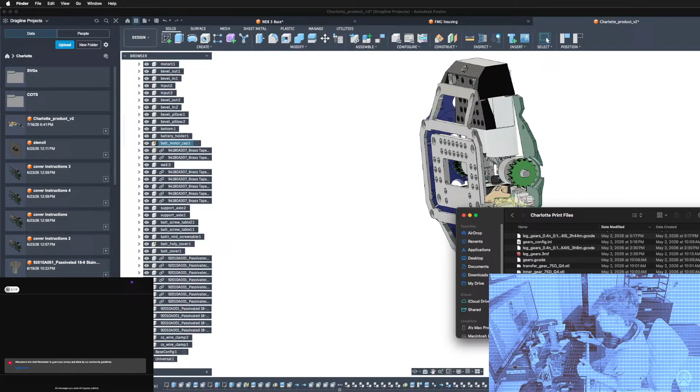Blah, blah, blah, blah. Okay. Cool, man.

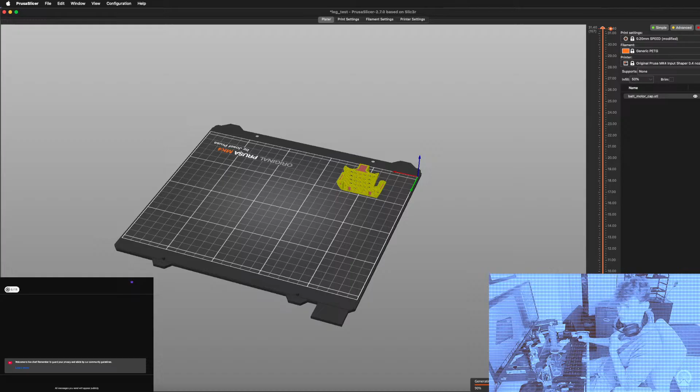Just getting some prints. Don't even worry about it. Word. Be right back. Don't mind me if I'm limping.

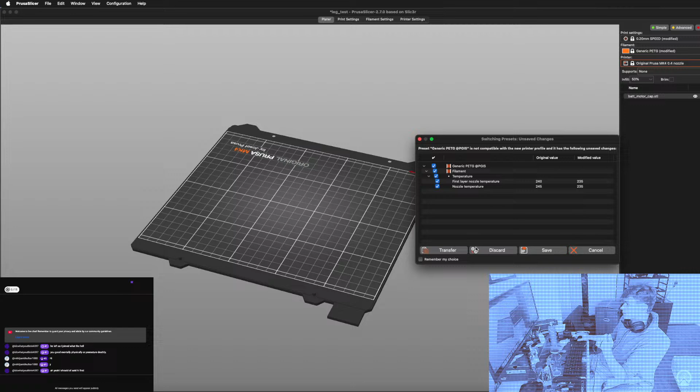None. Okay. Nope. Stop. We gotta restart this. Yeah, I should have said hi first. Yeah, come on, man. You just said he left as I joined. What the hell? Alright, be right back. Oh, fuck me.

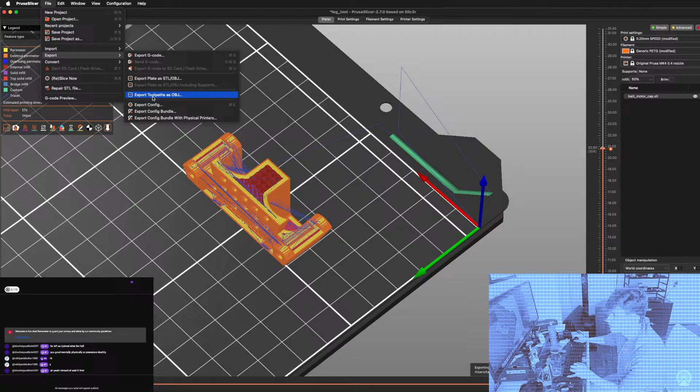Prints are not looking good. Gotta go a little slower and a little colder. Oh. But I think there. Okay. We'll try that. We will try it. And we will export this config so we don't forget. I'm going to call it int config for real this time.

Cool, man. Batt motor cap.gcode. Let's go. Hit it. Sorry.

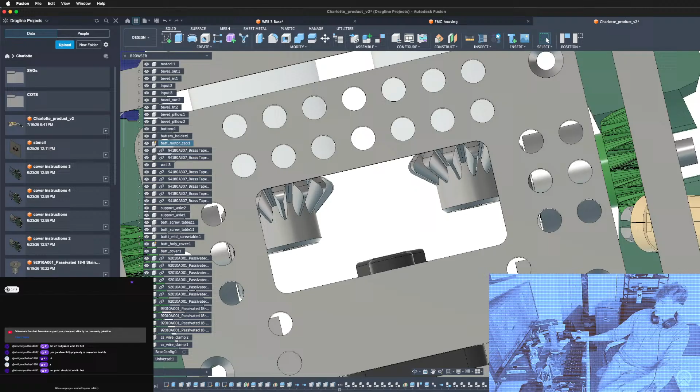Oh, my knee hurts, but the doc said that my critical knee components are fine, thankfully. So I'm just going to be swollen and limping for a couple days. No problem. I am, of course, indestructible. That is something that I don't say to my girlfriend because she will immediately dispute it. But that's what we're going to go with today.

Cool. So that's Charlotte. You guys know her. You guys love her. Just tinkering with a couple things over there. Get yours now. But we're going to go back to the web because the web is coming to a place where it's going to be done soon, like the design. So

Excuse me. Jesus. It's still smoky outside. I can only see about 2-3 blocks in the distance. Thank you, Canada, and thank you, billionaires.

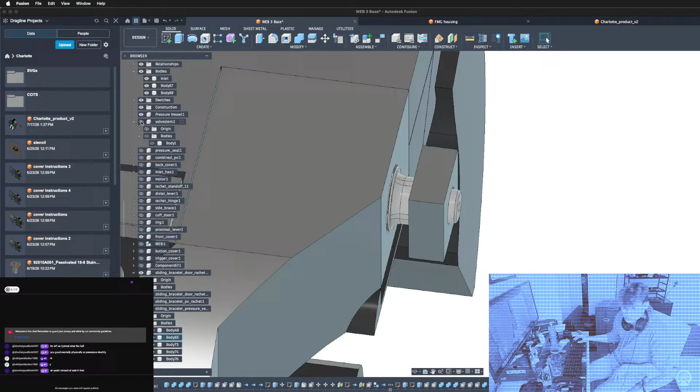So we are going to work on this. You can see the pressure vessel shape is coming into view. I have the valve placed here. I've made it shorter than the old valve. Where's the old valve? Right up here. That's the old valve. That's the new valve. So shorter because we don't want things sticking out as much in this design. And it doesn't have to stick out as much, I hope. We'll see.

I still don't have the mounting. That's part of the reason why it had to stick out so far on the old design, because there was mounting. But yeah, pressure vessel, kind of a crazy shape. So we're going to have to deal with that if we can. So what is going on here? That's one part, right? Okay. Cool. That's what I thought.

I need to figure out exactly what kind of mechanism I can get away with here, because I'm starting to think of different things other than the 2 levers that I had before. And I'm kind of like, should I be doing that or shouldn't I? Because a lot of thought went into that initially. So what I want to do is actually watch the video where I created this. It's kind of like reading your own paper, I guess, to try to remember what I did and why I did what I did. Go here. All the way back. This video.

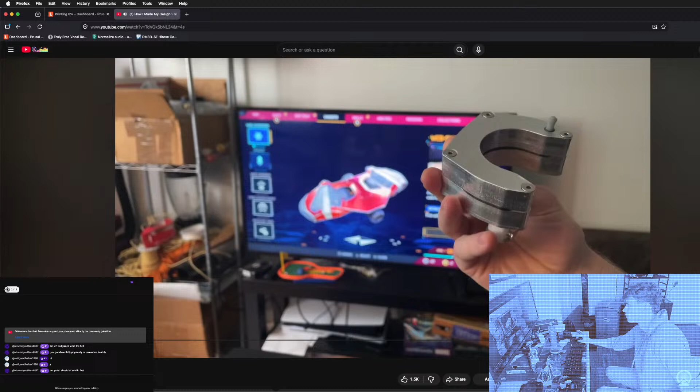Be right back. I have to do better. Struggling how to end that commercial, balls of steel. We already did the brick, and then you did the hammer. Cut to black! Yeah, cut to black. That's an excellent idea. Boom! So I came up with this random way to talk about this rather interesting comment that I got right here. And I'm not going to put the person's name. They also gave me some really helpful advice with the machining, which is so much appreciated. Thank you so much.

I just want to sort of open the discussion a little bit. Whether you use guns or you don't use guns, or you like guns or you hate guns, it's just really not a matter of fact. Newton's fourth law of motion is not that guns are the best way to protect yourself. Maybe just think about what the future could look like.

But then we also have to think about the different kinds of defense. What kind of situations will people be in where they need to defend themselves? If it's home defense, firearms may be the best way to do that. There are a lot of people who carry things like mace or pepper spray, intentionally non-lethal methods of self-defense. And like this person said, the device does not really need to exhibit a capacity for murder to be an effective deterrent.

When they're having a night out, or they live in a bad neighborhood and have to walk home. Ladies, you know what I'm talking about. Men, talk to your girlfriends. You're having a night out, you could encounter people who are dangerous and they might not be armed. And mace and pepper spray is a very effective deterrent for these people.

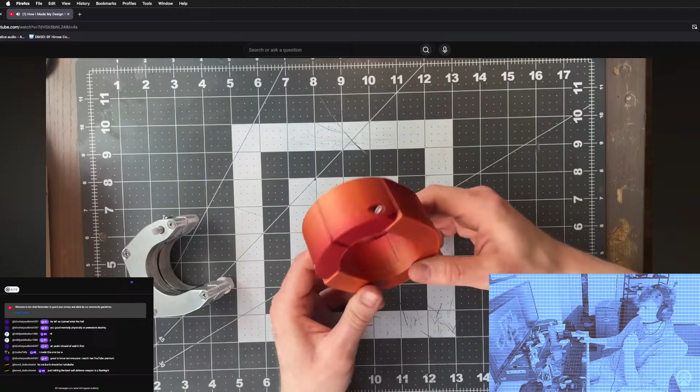Sorry, guys. So the first thing I want to work on in this video is having something where you have this device here, and then you've got these two parts that are on a pivot point. So when you want to put this on, imagine a full bracelet. You're just going at it just like this. And then let's say there are some springs that bring these back around. Then when you want to take it off, there's some button that undoes this latch. This was cool, but it doesn't really work when you have to fit stuff around the whole bracelet.

I also realized, because I'm an avid watcher of many 3D print designers on Instagram, that I could actually easily embed these magnets inside the 3D print by placing them in the middle of printing. That's a technique that I did not come up with, but it is super handy. So there's just a magnet inside there and a magnet inside there, and you can see they stick together. There's no fasteners needed, no glue needed. This is the magnetic spring.

I also added sort of a stop. This can only rotate 90 degrees. And I also added a little latch mechanism. So you can see here, there's a little leaf spring here. This didn't work, by the way. The leaf spring looks like this on the inside. And it's super easy assembly. All I have to do is stick it over.

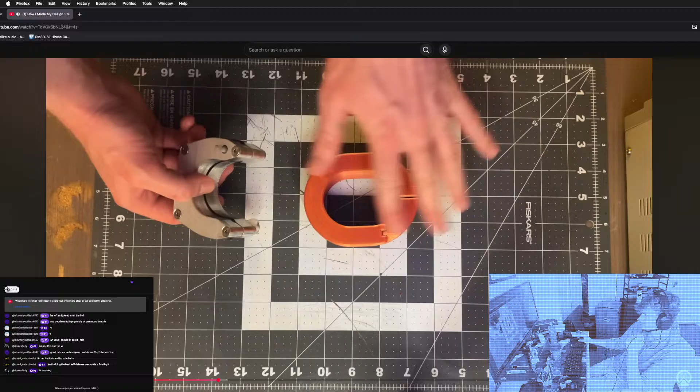The only issue is this kind of leaves minimal room for everything else in the wristband. The part of this clasp mock-up that doesn't move is actually mostly taken up by the pressure vessel itself. But this is definitely the clasp mechanism that I want to go with. So we're going to need some creative solutions to figure out where to put everything else that goes into this device.

To start, I want to focus on the valve actuation. There's a bunch of different mechanisms that I've created for valve actuation in the past: levers, screws, gears, pulleys, capstans, all sorts of things. I really want to try to streamline it, come up with something that's compact or at least fits within this C shape, and something that is optimized from an engineering standpoint, in the sense of what is the minimal transmission that we need such that our actuator can open this valve.

It takes quite a lot of force to open this valve. I don't know exactly how much, but the first step in figuring out what kind of transmission we need is to actually measure that amount of force. All right, so I've mounted my pressure vessel to the table here.

The liquid will be at the bottom of this pressure vessel because of gravity, and that means that I can see when a stream is coming out, because if it was vapor, it would be invisible. And then I have this sort of marionette controller. I have no idea what that's called. I've built it such that it's just a single rope winding through this entire thing, so that the tension is the same, and this mounts right here.

And I've got this thing attached to this spring force gauge, and I can pull on that. Sorry, it's not very sophisticated. I intend to just take slow motion video from directly below and just watch what the reading on the force gauge is at the instant the valve is opened.

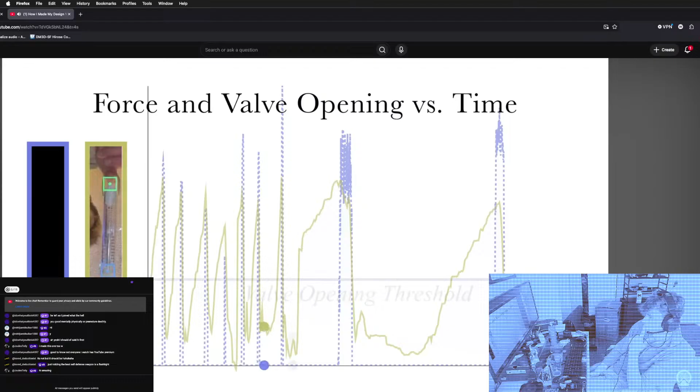And so I could overlap these two graphs and then only sample the force readings above a certain valve opening threshold. That gave me an average force of opening the valve of about 20 newtons and a maximum force of about 28 newtons. This contrasts with another analysis I did, that is the force based on the vapor pressure and the diameter of the outlet, which predicted only about 5.6 newtons. So there must be quite a lot of friction, or there must be some other force acting upon this valve when it tries to open.

You didn't miss much, Shira. I'm rewatching this because I need to use the analysis that I did here in my new valve actuation design. I don't want to do it again. I just want to recall what I did over a year ago because it should be the same result. But I kind of want to see if I can get away with something that's not the levers here, because I want to try to reduce the compliance. And when you have a really long lever, and I do want to make it out of plastic, I could machine everything, but it's just not feasible from a cost standpoint. So I want to see what I can get away with, maybe less material in bending would be nice. If I have to do the levers, I'll do the levers. I'll find a way to do it right. But it has to be the same kind of transmission with the same kind of gear ratio.

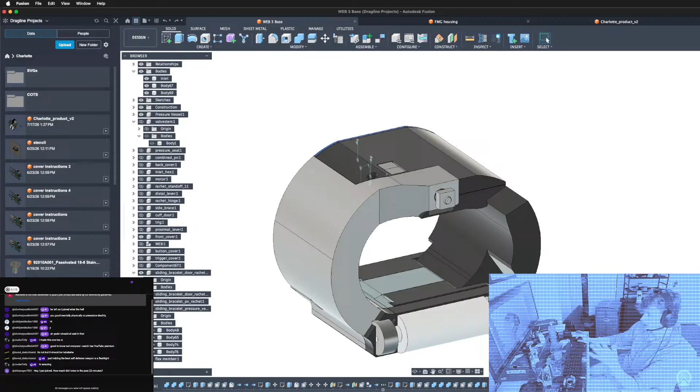So the thing is, transmissions are all about an equivalency of power. So power in has to equal power out. Now that's assuming efficiency is 100%, and this essentially would only not be true if there's friction in this transmission, which of course there will be, but certain types of transmissions are closer to 100% efficiency than others.

What is power in? It's equal to the torque multiplied by the speed. Now this speed is in radians per second, but we can turn it into rotations per second by multiplying it by 2 pi. Here we represent rotational speed as n rotations divided by t time. On the valve side, we have this valve that has to move a certain distance, x. And the force that's exerted as it moves this distance is F.

That's what we measured. Now we're going to assume this force is constant as the valve moves, and that means the work that is done, which I'll represent as W, is equal to F times X. So if we want to get the power that's transmitted to the valve, we simply have to divide work by time. Now, the key equivalency between these two is that the amount of time it takes the motor to spin to open the valve is the same amount of time it takes the valve to open.

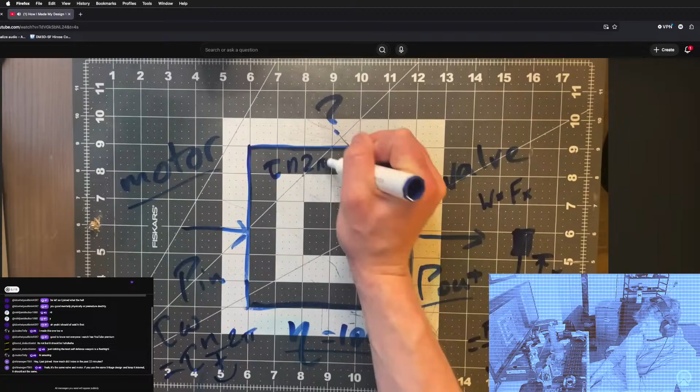First, let's start by setting power in equal to power out. Torque N 2 pi over T equals Fx over T. Since these times are the same, we have Fx equals T N 2 pi. Now, we have this torque as a function of voltage. That's the data that we gathered for the motor. And if we rearrange this, we can have the number of rotations that are required to open the valve as a function of voltage as well.

Now, this is actually a lower bound. Essentially, what this is telling you is that it's not physically possible to open this valve with any number of rotations less than this amount. Okay, great. Let's keep that in mind.

So the number of rotations is key here, right? Because in this original version, I only have the motor rotating halfway around, and that's great because then I get a lot of speed out of that, right? Because it doesn't take very much time for the motor to rotate halfway around. If I wanted the motor to have to do like 5 rotations to open the valve, which according to this lower bound that I've discovered is still possible, it would take more time, and that's not as nice for a very quick release mechanism. This is good info.

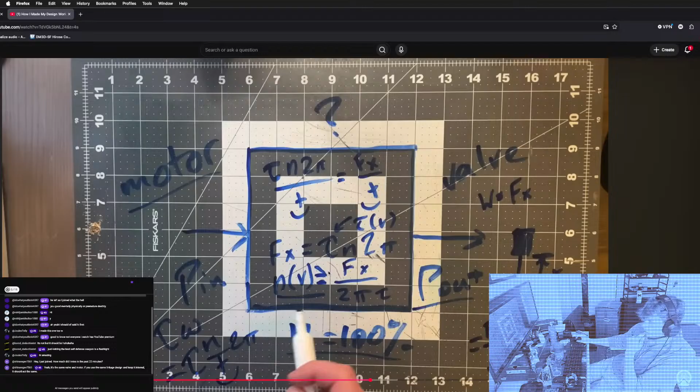With any number of rotations less than this amount. So this becomes our lower bound for what is possible. But then there's a question of what is this torque exactly? A key characteristic graph of a motor looks something like this. So if this is torque and this is speed, this is called the stall torque. And that's what we measured. It's the torque when speed is 0. This is called the no-load speed, because it's the speed when the torque is 0.

Now, what about the effect of different voltages? Because we measured this stall torque at several voltages. Let's say this is the graph when voltage equals 1. If we increase the voltage to, let's say, 2, it just shifts the curve upward like this. So you can see we do have that increase in stall torque that we observed from our graph. And our data for stall torque, depending on voltage, had a very linear relationship with an intercept at 0, and we fit a best line to it. And this relationship actually is theoretically expected.

The reason for that is because you can model any DC motor as a voltage applied across an armature that has some inductance and some resistance, and another voltage where the voltage across this is equal to the motor constant K times the speed, and this is called back EMF. Now, when we're at stall torque, the speed is 0. This inductor usually has the equation voltage across the inductor is equal to the change in current, but because we're at steady state, current isn't changing. The voltage across this goes to 0.

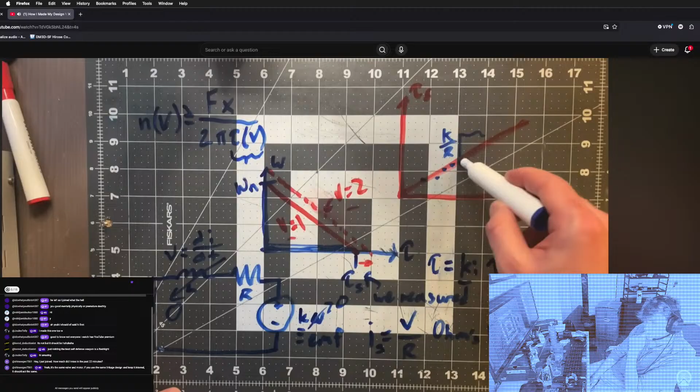Hi, it's me editing here, and I just wanted to say I did measure the resistance of the motor, and it's about 7.5 ohms, which means we can actually calculate the motor constant without ever measuring current, and we get a motor constant of about 0.05. So it's kind of cool we got all that just by taking a few measurements, but we don't want to run this transmission at the stall torque, right? Stall torque means the motor isn't moving. So we do need it to move.

Now recall that the power that a motor transmits, as we talked about briefly before, is equal to the torque multiplied by the speed. When you define your operating point on this curve, power is actually the area of the rectangle that's formed between the origin and that operating point. So we actually get the maximum power transmission at the stall torque divided by 2. Now we can change the ratio S. So right now we're talking about S equals 0.5. If you move S closer to 0.3, you have a little bit better efficiency, but...

Yeah, S basically being the percentage of torque that you want to transmit with respect to the stall torque of the motor at any given voltage. So that's why this line here is still a function of voltage, but it's S times the stall torque for S equals 0.5. So it's a line that's halfway down from the original line that we measured. If you move S closer to 0.3, you have a little bit better efficiency, but we're going to be working on maximum power transmission. Now recall that this is a lower bound, meaning that any point in the upper green area will actually still function. It's just that anything below the green area is physically impossible.

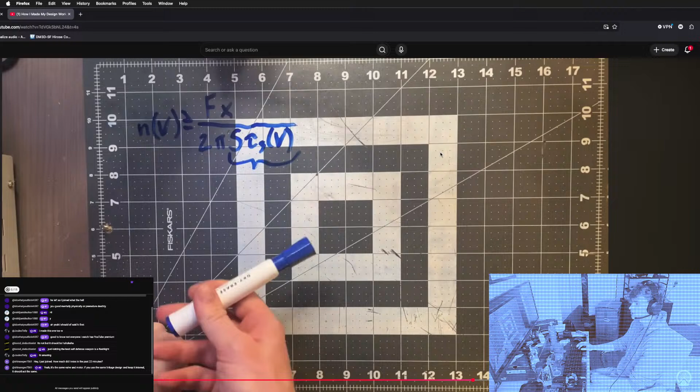Below the green area is physically impossible. Now, when I first saw this curve, I thought, wow, these rotations actually look quite low. If we're operating at like 2.4 volts, we only have to do half a rotation? That seems crazy, and that's...

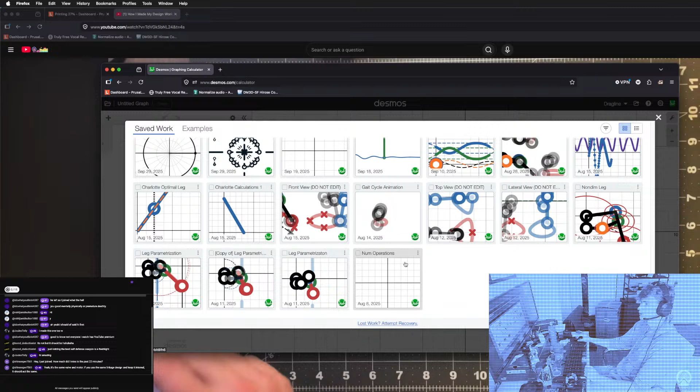Okay, something's up here. If I go to my original Desmos graph, let's see. That's why you always check your work, people. Oh, brother. Bruh. Don't do me like that. Come on. Okay, let's try to find this. I can't find it. Let me see here. No, it's got to be here somewhere, right? This one. Yeah, valve transmission. Okay. So that's this graph here. Okay, got to try to change the scale. There we go.

0.5 rotations. I literally have it marked right here. 2.48 volts, 0.5 rotations.

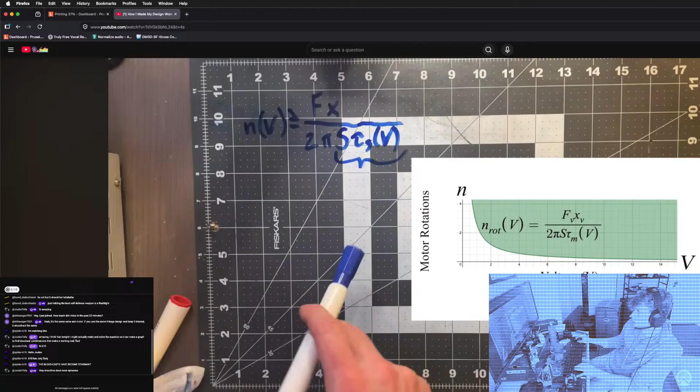Like I showed the area under the curve here, right? Yeah, the area under this curve is the maximum at half the stall torque. So that's what I was going to go for, maximum power transmission, not maximum efficiency. Efficiency in this case isn't really a big deal because it's not running continuously anyway. It's just a short burst of energy. So yeah, that's interesting. So I said 0.5, and it does look like it's 0.5. Very interesting. Where is my Desmos? There it is. So let's get that scale looking similar.

I also want to see the inequality as well. Okay. Please be green. Please be green. Okay. Right. So what this is telling me is that at S equals 0.5, for half a rotation to open the valve, I would have to use,

dude, seriously? I have 3 degrees in mechanical engineering. Of course I know how to use MATLAB. MATLAB is very expensive, and I'm no longer a student. Octave, yeah, that could definitely be used. But Desmos instantly comes with a GUI. If I'm doing something that requires more complexity, like control analysis or optimization, of course you can't use Desmos. But my choice would actually be Python at this point, because you have libraries for literally everything. Octave is just like MATLAB, but a free version, for people who don't know. But yeah, I know how to use all these tools. I'm choosing Desmos because the graphical user interface is immediate, so you don't need to program that in. It just helps me a lot to manipulate graphs visually. It's a great tool, and I'm not the only engineer who thinks so.

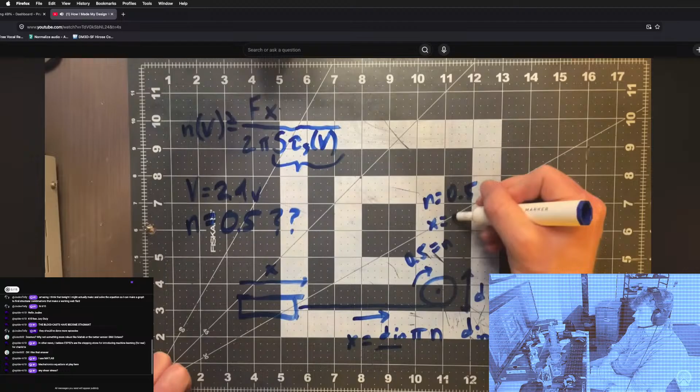Now, if we plug in some numbers here, x is actually quite small, 0.00088 meters. Wait. That's interesting. Did I explain where I came up with that? Because I'm kind of trying to remember. And I think I looked at the valve and was like, if it opens 880 microns, right? Let's look at the geometry here, because this is the same geometry that I had before. Unless I did change it, but I think it's the same. Same valve geometry.

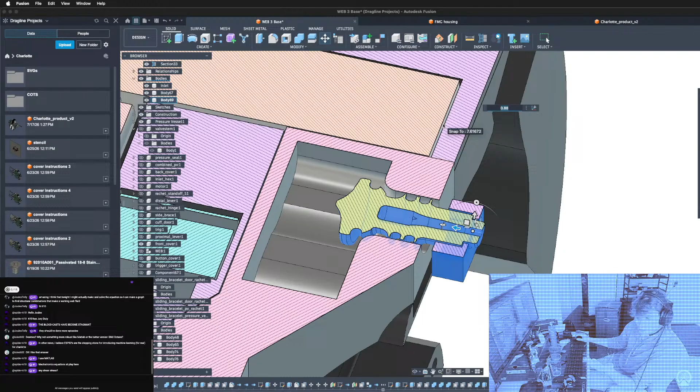Okay. So I said if this is sealed, 0.88. I guess we'll bring that along. I mean, yeah, you do open the valve then, but I think maybe the problem comes because if I am only expecting to compress this valve 0.88 millimeters, that can easily be compensated for by bending of 3D printed material. You know, 0.88 millimeters is nothing. So maybe I should plan for a longer stroke. You know?

Well, let me look. What did I actually do in Desmos? X. Here, I put that in. So that comes into play for all of these equations. And that's really interesting. If I amplify that, I'm guessing things will change quite a bit. Okay, let's see. Because what I want to do to get, you know, maybe maximum flow would be nice. 2 millimeters. How about that? That looks really nice.

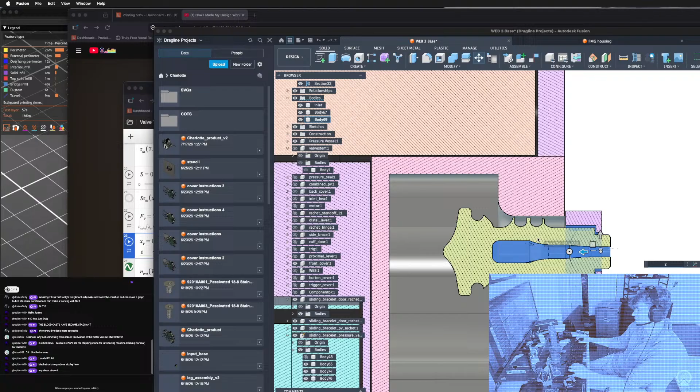That's like the maximum that I can get without these wall sealing O-rings kind of getting into precarious positions with respect to the wall. So 2 millimeters would be real nice. It's really interesting that I said 0.88 millimeters. It's really interesting. I know I measured that from something, somehow. All right, who's ready? Boom.

Okay. So now we're getting into something a little bit different. Now our safety factor has dropped to 1.3 from 3. So that's a lot more precarious. And it tells us that we should be using a supply voltage of 5.4 volts instead of what we have here, which is our supply voltage of 3.7. Just want to change the style. How about that? So that's our actual supply voltage. So bad.

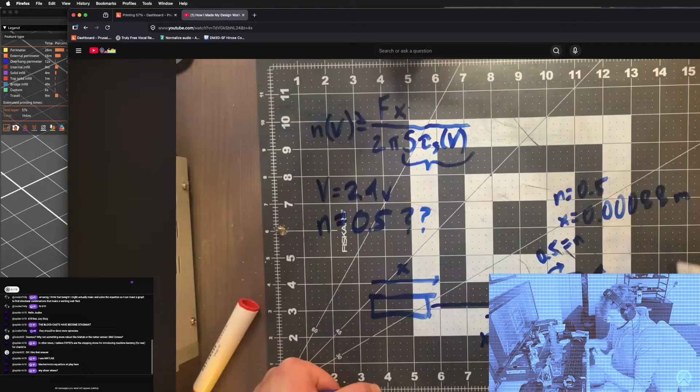Yeah. Okay, so my working theory right now is change the theoretical model to have a longer valve stroke. Yeah, because that also plays right into the mechanical inefficiencies in the valve design, the bending of the components that should be rigid. 2 millimeters of bending is a lot harder to do than 0.8 millimeters of bending.

This is defined by the design of the valve. It's going to be something like 0.0006 meters. You're not impressing my stream. Everyone knows you're... Stop. Yeah, so that's not happening.

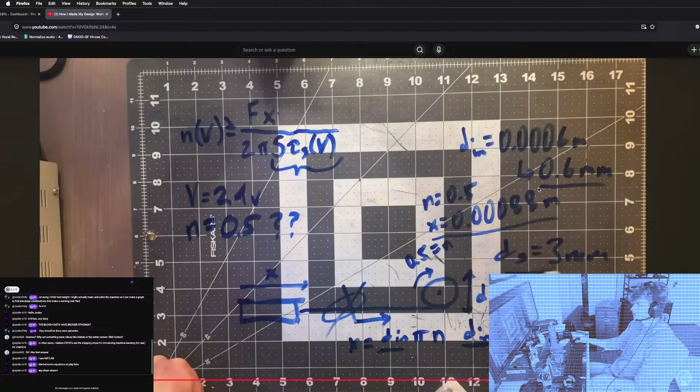And also, I don't want to do cable-driven mechanisms anyway, because they're really difficult to assemble. And the motor shaft is actually 3 millimeters in diameter. So what I'm saying here is this is physically possible if you have a shaft of that winch to be 0.6 millimeters, which is not physically possible. So I am taking that into account here.

So we really can't get away with any D in less than 3 millimeters, and probably should be even more than 3 millimeters. So this is why I'm doing a transmission, right? Because you can get a lot of torque theoretically from a motor if you just have a winch around a shaft that's extremely small, right? But physically that doesn't work because you can't have a shaft that's extremely small. How do we solve this problem, this constraint on the input diameter? This is where a transmission would come in.

We can rewrite our equation for D, again, as a function of voltage. This time we plug in our function for N as a function of voltage in the denominator. If we add a transmission, this equation for N is not going to change. So that means that everything in the denominator here remains the same. So if we want to increase the diameter of the input, we have to... Remember, this equation up here doesn't change because it's about power equivalency, which is not affected by transmission. To increase the input stroke.

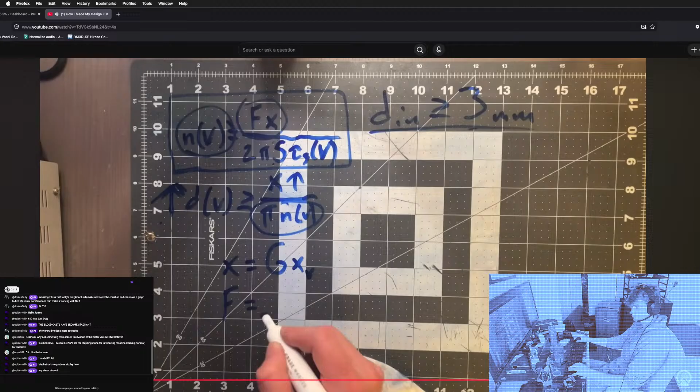What we can do is add a transmission such that the input stroke X is actually equal to some gear ratio, we're not going to use gears, multiplied by the distance that the valve has to pull. Similarly, the force that goes into this transmission is equal to the force the valve needs to open divided by that ratio G.

How many turns do we want the motor to have to do to open the valve? So if we have number of turns greater than 1, now we're talking about we have to do things like gears or belts, you know, like transmit. We can't do like a simple lever transmission if the motor goes through a stroke that's greater than half, really. Transmissions that can go greater than 360 degrees.

If we keep n less than 1, suddenly we're thinking about using things like cams, slots. Cams for a 360 degree rotation, I suppose. Yeah, of course. As long as there are end stops. But to be honest, I do know slots. What am I talking about? I do know that you can create like a spiral cam. I've done that before, and I thought I was a genius, but I scrapped it for the cable shooter project.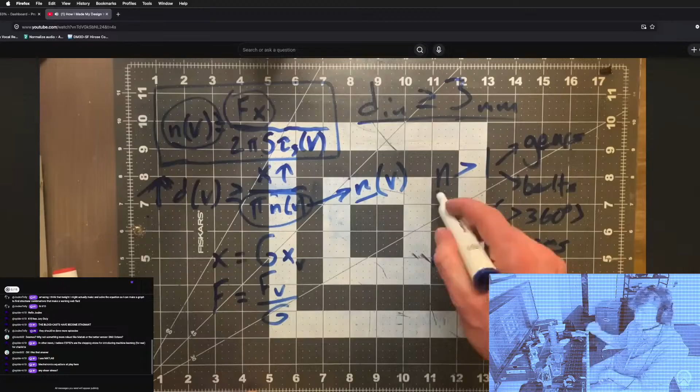There's a specific type of mechanism that I have my eye on, and that is where n is equal to 0.5, or a half turn. So I want you to imagine that your motor is driving a wheel, and this wheel is attached to some peg, and this peg is transmitting force to a lever, which has a pivot point here. And so as we get that half turn, the motor moves the peg this way. It ends up here at its farthest point horizontally, and finally ends up here. This means, of course, that this peg needs to have a slot to accommodate that horizontal movement.

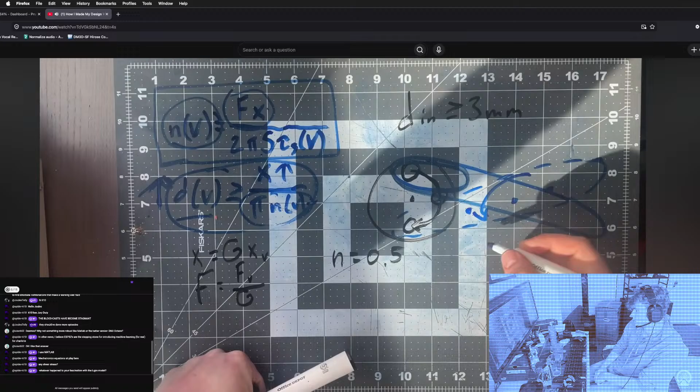The amount of space we have to work with is just what's on this bracelet. Here we have our motor, and the motor has an axis here. So I want you to imagine this wheel that we drew here is right here, being driven by that motor. So when you look at it from the front, you'll see the circular shape, but on this side you just see that. And the valve that we have to actuate is down here. That motion is along this axis. So what we could do is we could have that lever essentially with a pivot point here, basically rotating like this, and that lever basically...

I'm still fascinated by the LuGre model of friction. Just only have so many hours in a day, you know? That's for the cable shooter project I'm mainly thinking about, but I haven't had the chance to do the experiments I want to do yet.

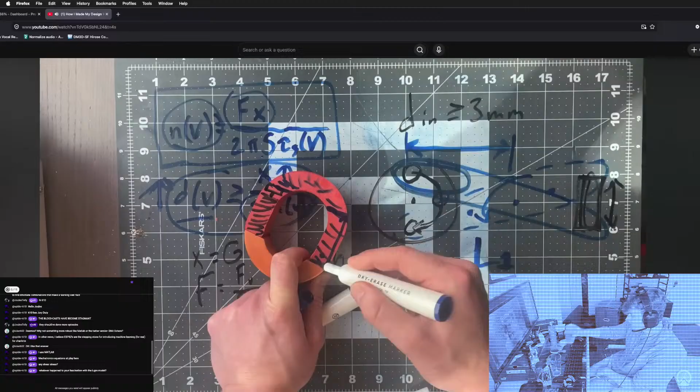It takes up this whole space. A mechanical advantage is the ratio between this distance and this tiny distance here. So we can see by modulating our D of V model, by adding G and modulating X, suddenly we see at 2.4 volts, this transmission... So that's where this comes into play, is the gear ratio of this transmission.

Where the heck is my... What the heck? What button do I press for showing all the windows? Okay, there it is. All right.

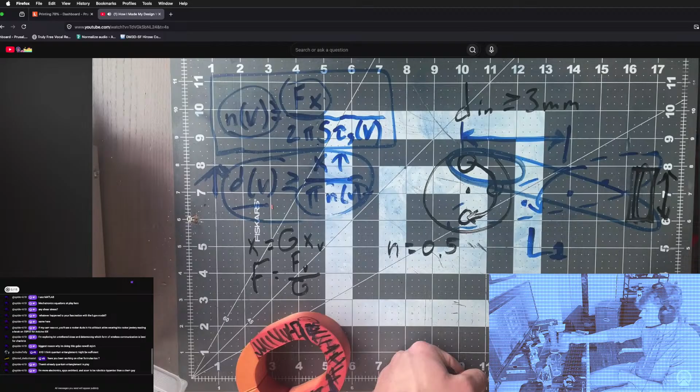I think something interesting becomes possible from an engineering standpoint, because D is suddenly above 3 millimeters. What I actually decided to do: this part is taken up by some lever that has a mechanical advantage, and this part is taken up by another lever. Our G actually becomes L1 times L2. When we add this G to modulate our D of V model, suddenly this becomes very feasible from an engineering standpoint. After tweaking the model a little bit, I got exact numbers that would work for L1 and L2, such that it would fit on this wristband and be able to actuate the valve theoretically at a very low voltage, possibly less than 3 volts. I don't expect it to be that low in real life. A very exciting prospect for me.

Okay. So I'm in an interesting situation here. Am I? Wait, I think the math is consistent. Hold on. Because the pull distance at the input that we're going to need, this is all based on winch geometry, right? That's very simple geometry. So that's x1, and D in at V min is the diameter of the shaft that I'm going to need. And if we multiply that by pi, we get the pull. Okay, so the math is consistent. Right, thank God.

So how do I translate the winch mechanism into something that I actually will like to use? Because I hate winches so much. I hate them. But it would work.

I'm better at making mechanisms than I was when I made this video. So maybe I can take the old math and apply it to some new engineering. I could have a pulley shaft of 3 millimeters easy. That's no problem. It could rotate once around, and then this gear ratio would have to be still 6.

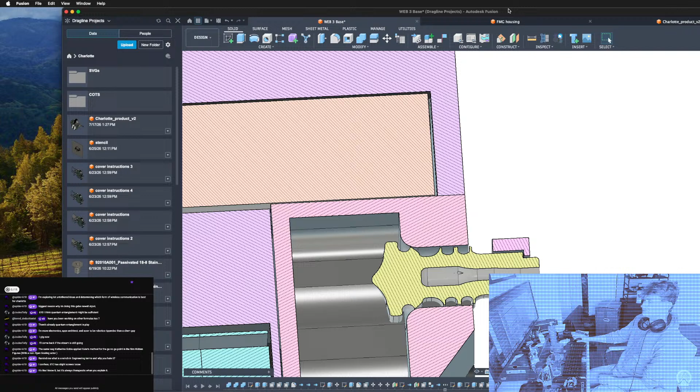So everything that fits over here, somehow transmitting power around the circumference of this bracelet, which we accomplished before with the levers, but now we can't use levers anymore because we want to do a full rotation. And also the levers have a variable transmission. I'm going to start drawing some shit.

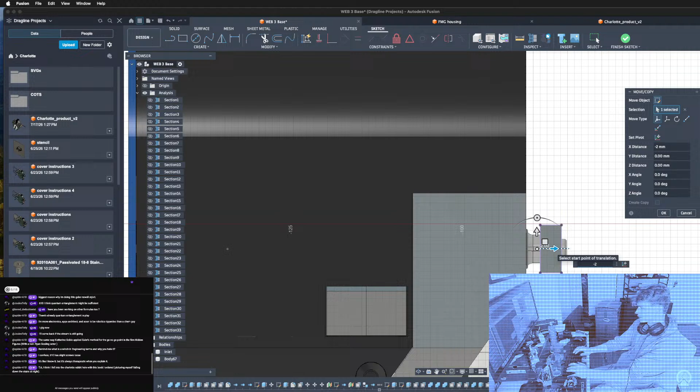So I'm just going to pretend there's a point like here. Okay. And that point has to move 2 millimeters this way. That's consistent with the theory. Okay.

Picturing yourself falling down the stairs at night. What do you mean? What does that have to do with Charlotte? That's horrible.

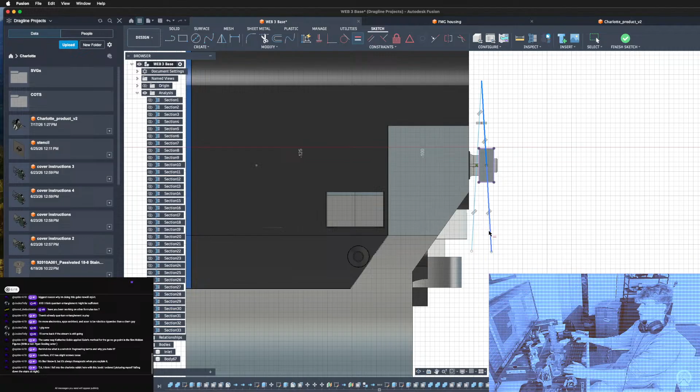I want to imagine that I have a lever somehow. Right? Not looking at the physical yet, just the mathematical. So these are equal. So this is about where this pivot point is going to be. And if that lever has a mechanical advantage of 2, that means this is all parallel and equal. Okay.

So obviously, I wonder if I can make a driven dimension. Is that possible? Let's try that first, then try this. Yes, create driven. Okay, and then what happens if we delete this? It's still driven. But also incorrect. What? Oh, no, it's not. It's always 4. Of course it is, because it's 2 times 2. Great. Well, this is nice. It doesn't stick out too far. But I am kind of wondering. What can we get away with?

That's a good idea. Yeah, that'll be a cool Charlotte project. I think that's great. I am printing some of your parts now.

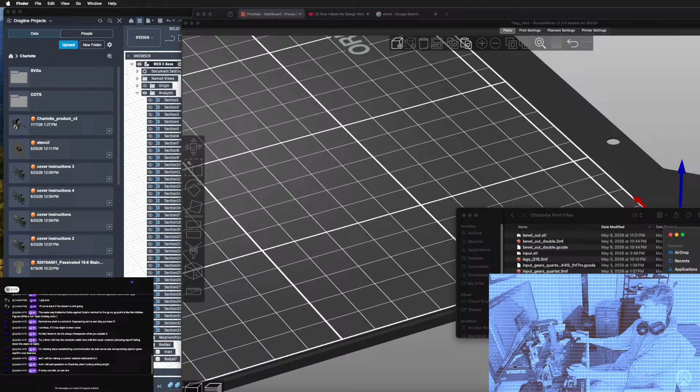Oh, it's done. I should print the next one. Well, I gotta check how it looks first. But yeah, should be good. Let me just get this ready. Battery config. Battery holders and next part. Okay. Great. No, no, no. Go away. Slice now. All right. Okay. Be right back.

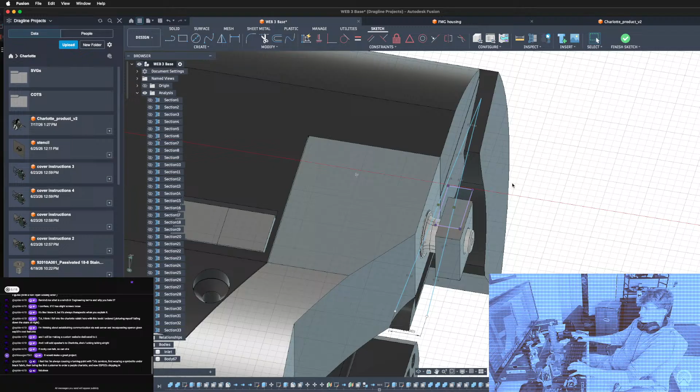So just because this travels 2 millimeters doesn't mean it needs to be attached to something that travels 2 millimeters. You know, it can just be pushed down on. And then the mechanical advantage isn't theoretically the same, but might as well be. So what I'm thinking, because this is kind of sticking out here, I was wondering if I could get away with something like a circle shaped lever, you know?

So we put that there. Like the pivot point could be that far in, but where's our motor? Because we might need to go past it. Yeah, our motor's there. So if we can attach to the top and the bottom, that could work. Let's just see.

Are you changing the linkage reduction ratio at all? I'm changing it, but I haven't already figured out how I could change it. So we've basically changed a lot of the parameters. The input stroke is not the same because I found out that we don't actually get a decent enough safety factor if our input stroke is 0.5 and we want a larger output stroke. So I'm changing the input stroke to be a full rotation of the motor. That's a key change.

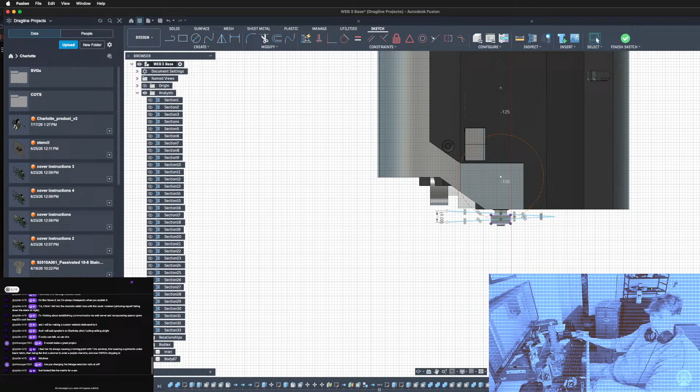Which means that we can really make the reduction as much as we want. But right now I'm going for 8. It could be less, but I just want to see what kinds of geometries we can generate that would be reasonable. So yeah. Go away, circle, go away. Okay.

I'm gonna get... I'm just like, can we get away with what I want to get away with here? Maybe. But the motor, we definitely can't do pretty much any geometry in this area because that's going to be the motor. So I'm thinking about where the linkage attachment point is going to be right now.

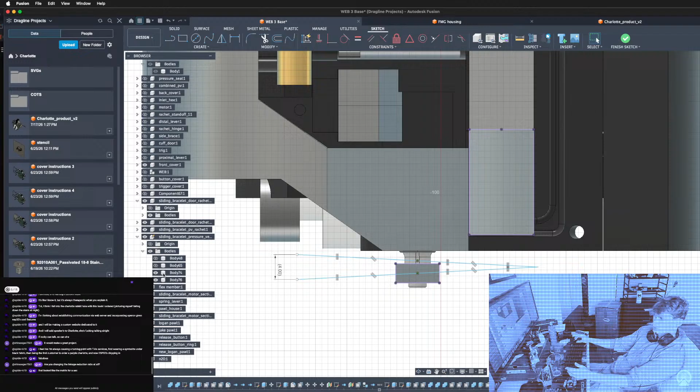What? Oh yeah, I want to see this again. What's that? Oh, that's the motor cap. What's this? Yeah, okay, cool. So if we put the pivot like over here, you know, you don't want it to be pushing down like too much. Let me get rid of these lines because they're not really serving me a purpose at the moment. They're kind of just clutter. So whatever kind of surface I'm going to have here, that could be reasonable. And this here.

Well, hold on a second. We know this is going to be coincident with this. Okay, and let's say it also has a midpoint.

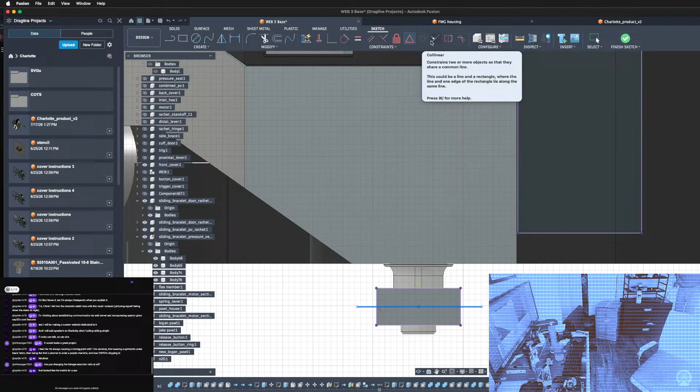Oh, my knee is killing me. Fuck, I'm gonna get some Advil. This is killing me. Jesus, I don't know why I have to be doing so many dangerous things. This is what I do. Good stuff, man. Ugh. Okay. Oh. Excuse me. Okay.

Midpoint constraint. So I'm thinking about the rotation point. The fact that I still want this to coincide with this point here, and it's going to be the same length as this line, but it's not necessarily going to be at the midpoint. You know what I mean? It's going to depend on where the axis of rotation is. So how do I figure that out? That's a great question. Basically, it's a circle.

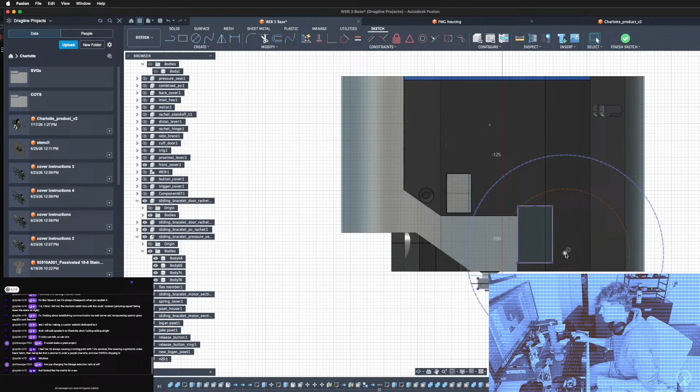Let's just draw a construction circle and another construction circle, concentric because they have the same axis of rotation, and this line and that line attached. Okay, so that's what it looks like pushing down on this point if the axis of rotation is here. Okay, so it's not too bad. As you can see over here, the angle is a little bit less extreme, right? But that's if the pivot is outside. I kind of want to have it inside. That's way too crazy. But also, I think this isn't the only constraint.

Right? Because there's 2 degrees of freedom I'm moving here. Yeah. Interesting. So if I make this safely here by, I don't know, what's safe? Maybe 3 millimeters. And this one safely in here by, I don't know, 5 millimeters. Where does that put our pivot? Oh my God. Yeah, it's kind of too far, I think. To be really safe, well, 3 is okay. 3 is okay to be safe. That gives you 6. 3 and 3. How about that? All right.

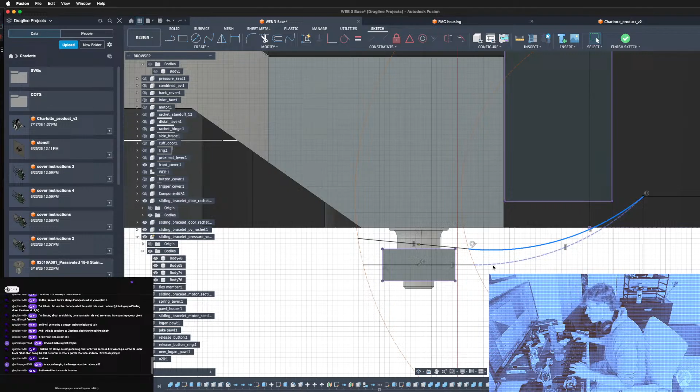So that's like pivot is there, some kind of arm geometry here, going to this flat point here, going here. And then you have to think about the other side of things. So this distance and this distance are a little bit different. But if we're going for 2 millimeter travel over here, we need to go for 4 millimeter travel somewhere else. That makes sense, right?

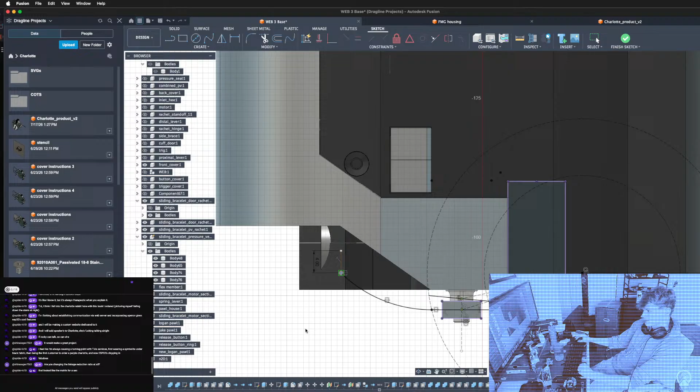And if I want to set this mechanism inset inside, that would be best. And if I want to make it look nice, then what happens if I mirror this thing across this line to make it symmetrical? Interesting. Very, very interesting. And what if I do like this? You know? And that means similarly, because I just want to make sure that I'm understanding this correctly. Yeah, I mean, that's what I expected.

Similarly, though, we have this thing, and we can mirror that line, and it should be the equivalent effect, but in a rotated frame. And here we get out just under, well, is this 4.132? It's hard to tell. Basically depends on what we put in, but it's approximately there. It depends on how we're pushing on it, of course. It doesn't just depend on the geometry. It depends on where on this lever we're pushing at it. And if we do a distance of 2, a distance of 4 to push on it, then yeah. Okay. This is not bad.

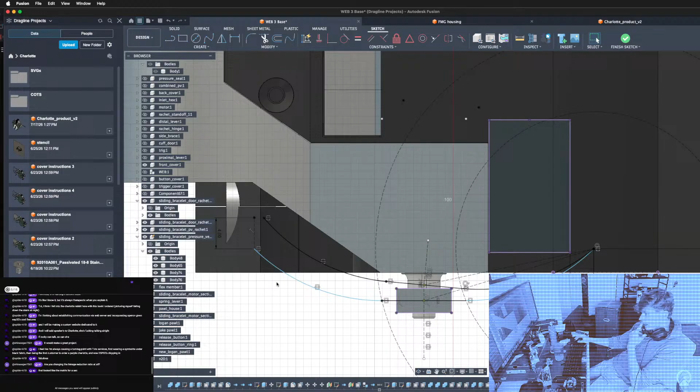But I am a little... Oh, what has happened here? Whoa, whoa, whoa. Major problem. Major L. Huh? I'm sorry, sir. You are not my friend.

Dude, what? Huh? That's all good. Give me another arc. Oh, Lord. Okay, because...

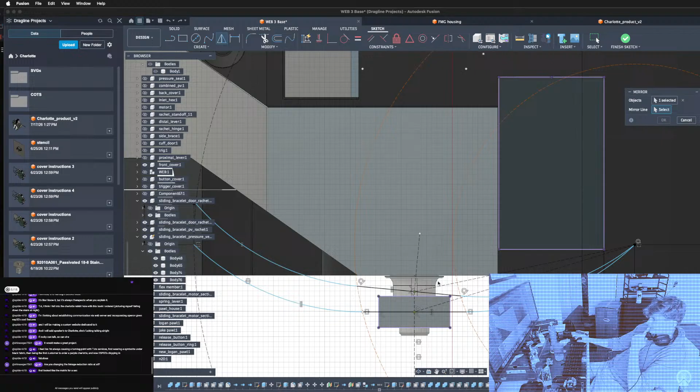71.698. 71.698. Yeah, this is... Okay, so that's the shape. That's the shape. The mirror is doing a weird thing for some reason, really weird thing. Let me try that again because I'm a little bit wigged out by that. Yeah, what's up with that?

Oh, this isn't in the midpoint. That's the thing. I drew this at the wrong place. That's the midpoint. Duh. It's not about what you're pushing on, it's about the shape of this lever. Yeah. Okay. Cool.

CAD Goblin back to his usual stuff, and today I'm blue. I'm blue.

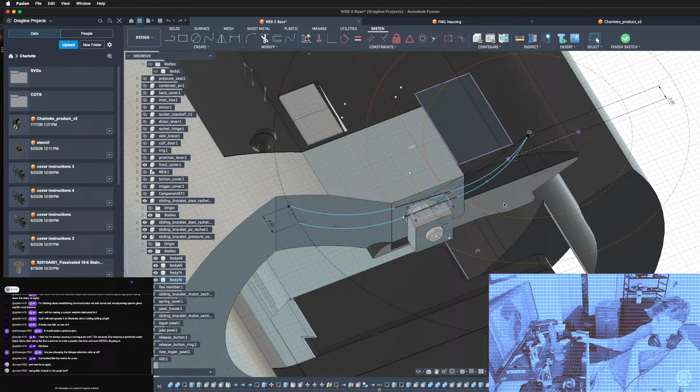Okay. So that's a lever with the mechanical advantage of approximately 2, maybe, right? And that geometry could feasibly work where the pivot is hidden here and the application point is also going to be hidden. So nice, good start to having a hidden valve actuation mechanism. Very good start.

Now we have to make this go 4 millimeters that way somehow. Push on this 4 millimeters and with our motor pull 16 millimeters, right? So we got rid of the 2. Now we have to do a 4.

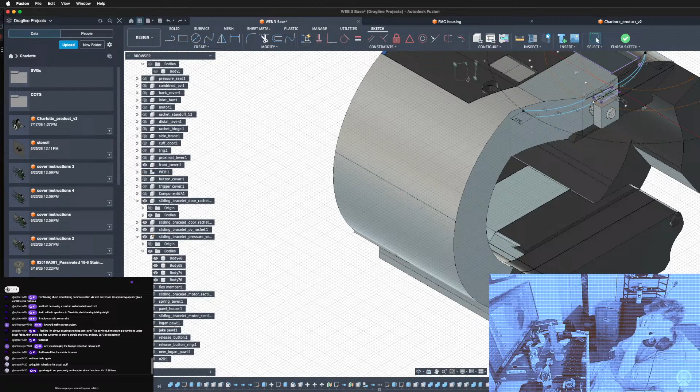Push on this 4, pull 16. Crazy thing is, I know we can't just use gears. Like, I feel like I know that we can't because the angle here, which I'm going to make as a driven dimension, where's that angle? 5.4 degrees. That times 8. That times 8 is not 360.

So we kind of have to use winches or something to translate linear to rotary motion. We can't just use rotary motion, even though I really, really want to.

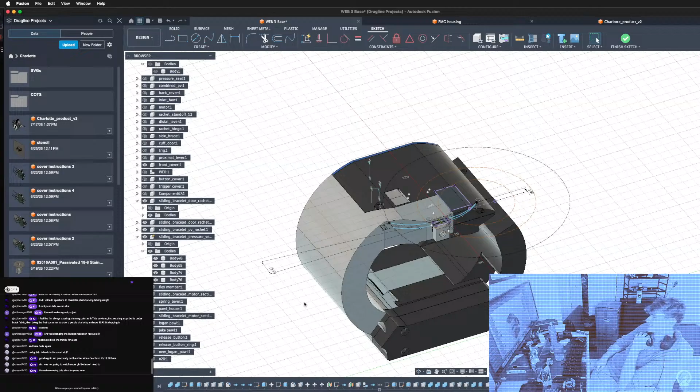I was not gonna watch Supergirl, but now I need to. Yeah, you're the villain, dude. You're Cream. I have been using this alias for years now. All right, that's what I'm talking about. Well, let's look at villain from Supergirl. Creme. They call him Cream. Creme of the Yellow Hills. Is he a comic book character? It's your boy, Cream. Well, I guess he looks different in the comic books. That's your boy Cream. He looks better here, for sure. Cool. Back to this. Totally not me. You don't have 11,000 face piercings? That's a shame.

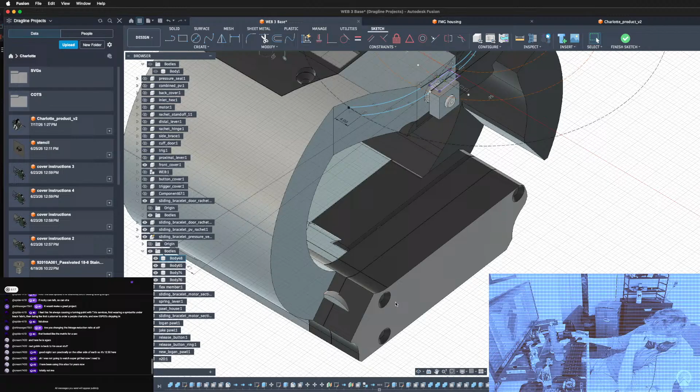I really don't want to use pulleys and stuff like that. I really don't want to. We could take the multiple lever approach again. Except the part where we absolutely can't. Because then I'd have to gear like a full rotation of this motor to something that only does a half rotation. Like I could do a 2-to-1 gear ratio here, maybe. And then I would be left with a 2-to-1 here.

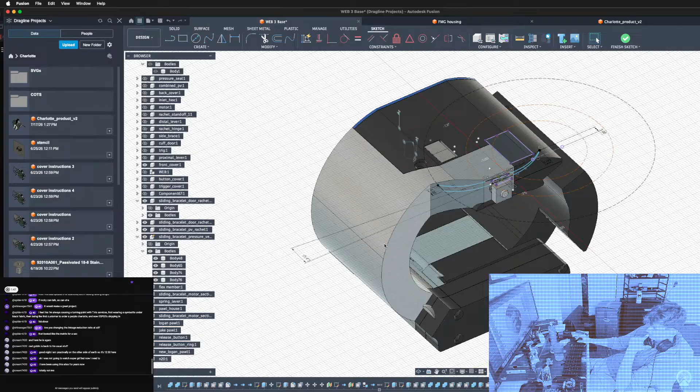I need a 2-to-1 gear ratio. And then something that transfers 8 millimeters to 4 millimeters. That simple. But 8 millimeters is tricky. Do we have 8 millimeters to even work with here? We have 11.5. That leaves us about 1.5 on either side of the mechanism housing. So that could work. But again, the linear to rotary component is just tweaking me out.

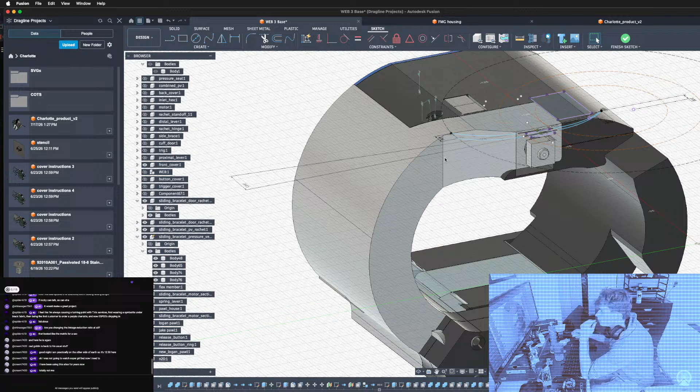Oh, God. I could have another lever. I could do exactly that. I could have another lever and then a gear to lever thing. It would have to be like a weird conjugate gear shape though, because this is here. Let's leave that sketch there. This would be a really interesting drive gear shape. But it might not be as crazy because the axes won't have to be totally skew.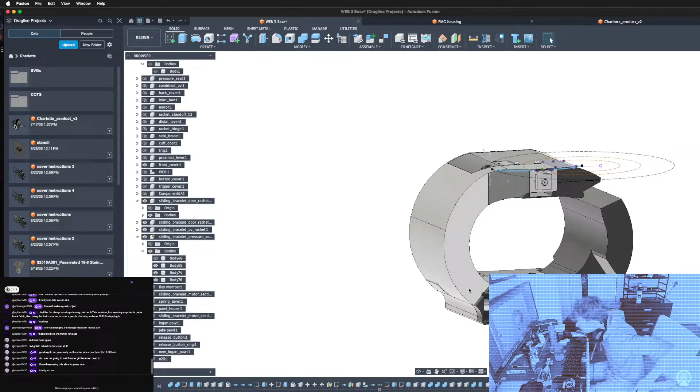The thing that sucks about bevel gears is that I don't know how to get, like, it should be pretty easy, right? To figure out bevel gears. Like, if I want one gear on that axis. Not this axis, but no, this axis. Exactly, this axis. And then one on this axis. Like, that's not skew, it's a simple angle.

They could have their mating surface literally right here. Halfway in between the two. So let's do that. Let's trim here. Some deja vu right now. Yeah. Okay. Parallel. Okay. Please let me select some lines. I'm going to save this before it disappears forever. I want this and this and this to be equal. And then I just want to make sure that we're representing equal angles.

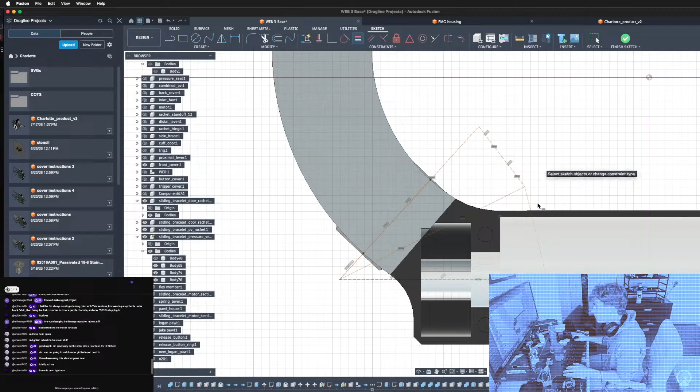Like, if I'm designing a bevel gear system and I'm like, here's two lines, they're X and they're X, they are parallel, they are also equal, bing, bing, and then this one's also equal to this one. Like, I could have gears like that. I think that's typically how that goes. I think that's how that goes, right?

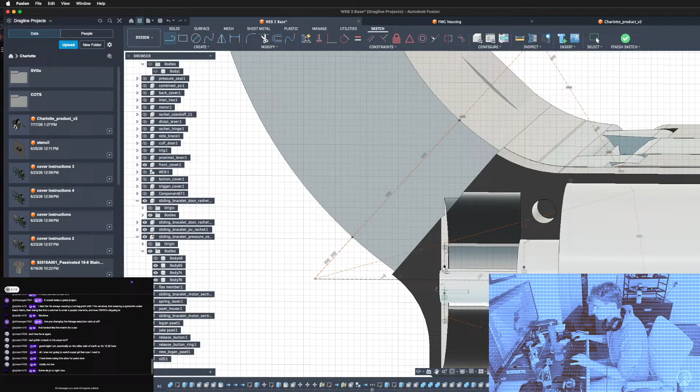Because then, what if I, yeah, if I'm doing, like, I don't know, point and point. If I'm doing a shape for a bevel gear, like a mock bevel gear type thing, like this. So if that's my one bevel gear, that's my other bevel gear.

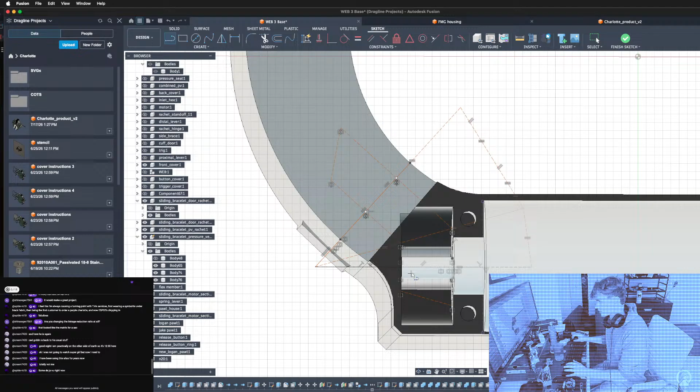Shape there. Okay. You see those two trapezoids there? Question I have is, how does this end up contact-wise? That is 7.637. 14.824. That's double, right?

You're not impressing my stream. Everybody knows you're using a calc. I forget what the numbers were. Show me the numbers, Mason.

7.637, 14.824. Is this right? Yeah. So it's not quite double, even though this angle is double this angle. Oh, because they're not. These are the rotations. Those are the rotations. Oh.

So what if I take away the... I kind of have an idea about how to make bevel gears now. I've never actually thought about this too hard. I've always tried to find 3D models of them. But I want to see if I take this away and I say I want this to be twice as much as this. So basically saying that, let's go here to here, and this are parallel, and this equals that. What happens?

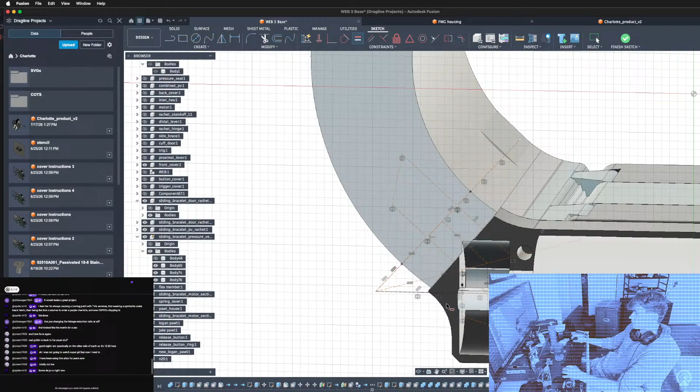This is a true bevel gear situation. Yeah. I can do with this whatever I want, depending on how close to the axis I want it to be. Okay, that's pretty cool. So these could be real bevel gears. Huh?

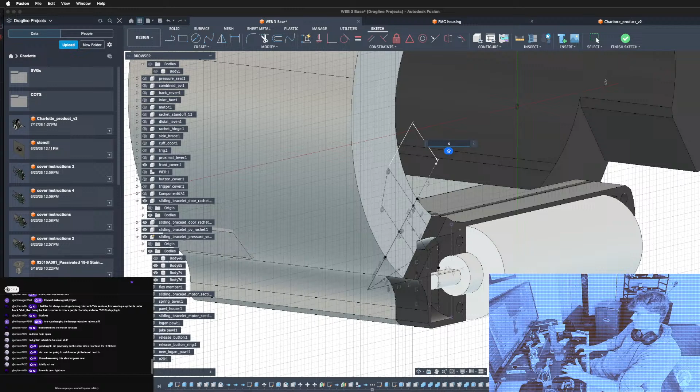But of course, we have a constraint on this distance here, because that's not going to cut it. That's going to come way out. This has to be only like, okay, this is where it all falls apart. This cannot be very big. This has to be like 4 millimeters. Okay. So that's where this all falls apart, because this is just not happening.

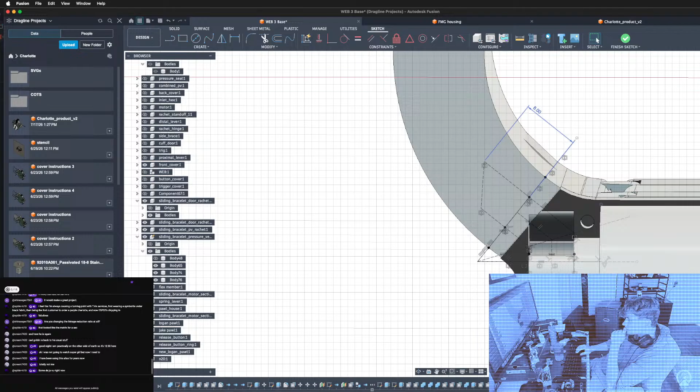Wow, seriously, dude? What the? Okay, what if I make it more? 5 millimeters. Still sucks. 6 millimeters. Still ass. 7 millimeters. Okay. Not great. 8 millimeters. This is why gears suck, because they need to complete a full rotation. Unless I don't need to complete a full rotation. But I'm pretty sure I'm going to need a full rotation, one way or the other.

This is why levers are boss, because they don't need to rotate all the way around. With here, I'm planning on making these small enough such that they don't poke out when I revolve them all the way around, but it's just not possible with the space that I have. Because this is the absolute max, for sure. You can't do any more than 8 in diameter. Like, this could maybe work. The geometry is not cooked. If I measure from here to here, it's 1 millimeter, but still.

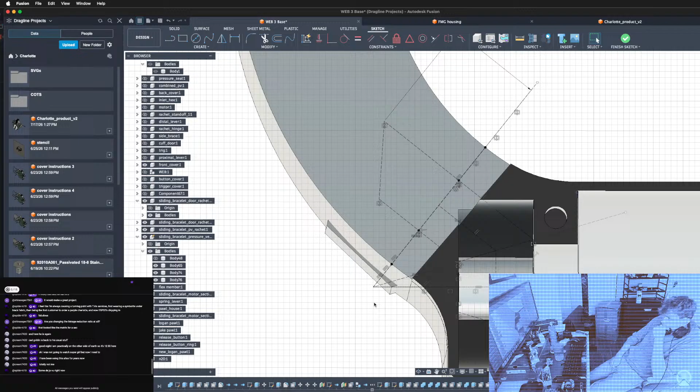At what point do I just say that a cable-driven mechanism is actually easier? You know? Yeah, I don't think the bevel gears are gonna work. I'm glad I mapped them out before looking for ways to make them, because it's just too big and too small at the same time. Ugh. Okay.

5 millimeter capstan shaft is potentially the input. 5.1 millimeters. With a 3 millimeter shaft, that only gives us 1 millimeter wall thickness. Not the best. But it could be done. Boy, oh boy.